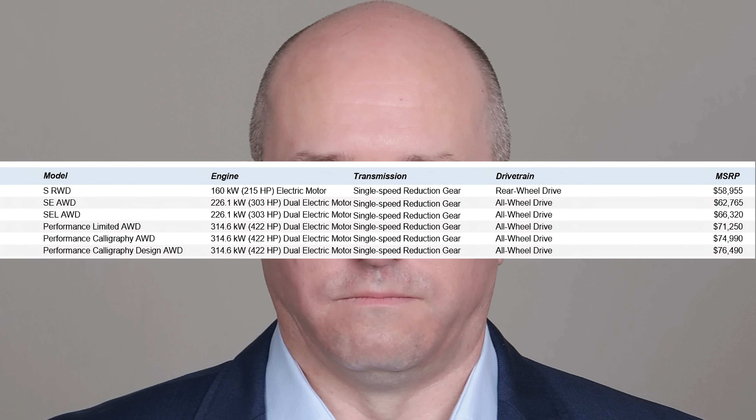But they really force you into the Limited or Calligraphy to get things like the premium audio system from Bose, including the active noise cancellation and a lot more of the niceties. And that's really pumping the price up past $70,000.

So the outside, they've spent a lot of time on interior and exterior design of this car. It's not really a big surprise for this brand. They focus a lot of their energy. They did have a global design team from Europe, the United States, and of course Korea to figure this out. And I think they've taken the best of all worlds here, because the outside, it's clever use of packaging, like in the sensor pack in the front.

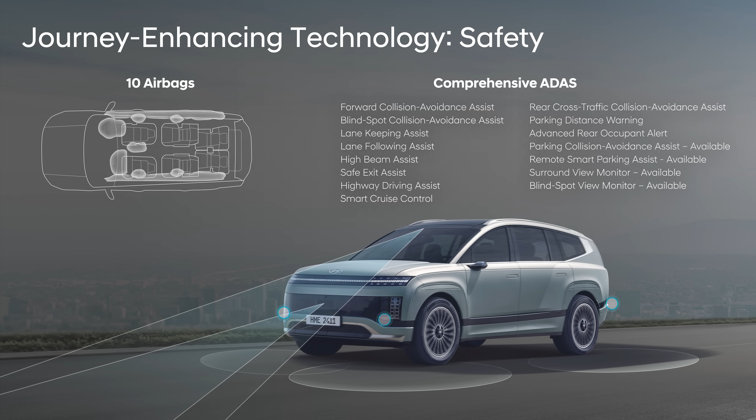They've hidden all of it behind this really clever black piece, and then you still have the individual pixel thing, which they talk about, throwing back to video game design and some of these things that the Ioniq brand has brought to the table. But other brands struggle with where to hide sensors. You see it with BMW, Porsche. Most brands really struggle with that, and they just make it so cohesive here. From headlight design to taillight design, it looks great.

And even the body lines now are not full of a bunch of crazy triangles. It's much smoother, despite the door handles being very gimmicky and bandwagony, very Land Rover-ish. They're super solid. I mean, you pull on them, you don't fight with them. It's not like they don't pop out when you need them to. So I think the software side of the keyless entry system is sorted out as well.

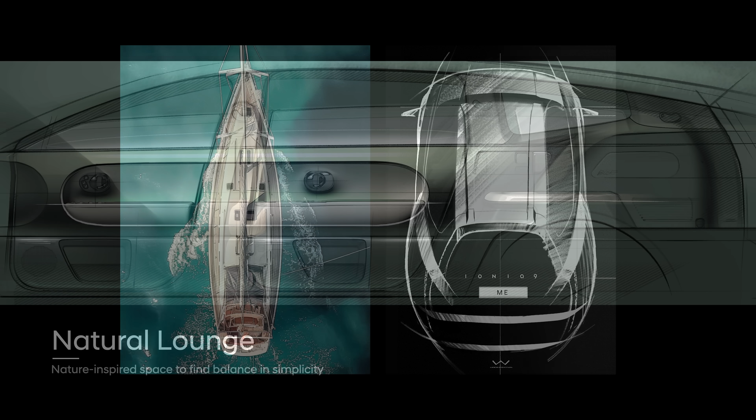The way that the roof line is, the way that the sides are, the way that the body is flowing air underneath, it is a very slippery car, and that's important when you're driving a big-ass SUV around. As an electric, you have to work with the battery pack confines, and they did a really good job here compared to the Rivian R1S, which really struggles with aerodynamics and range. This does not. But on the inside, a lot of the cohesion is also here.

The big thing that they tried to do is spend a lot of design on textures and feel, and that's physical controls, door handles that are physical, no electric actuators. The steering wheel controls are all physical, no haptics or touch. You have a physical rotary knob and tuning knob and physical buttons to get to your commonly used features. And your HVAC controls are partly physical, and then there's a touch-sensitive membrane here at the bottom, but you never have to interact with the touchscreen for any of that.

And the big thing is you're not in the touchscreen with this car a lot like you are in many other cars. And I think they're starting to understand that you can make a car feel great keeping some of the tried and true things, even though it might increase the cost, instead of doing generic screens. And there is a generic screen in here like every other brand, but really the software's gotten pretty good. It does slow down a little bit when I'm using wireless Android Auto, but overall the stability of it seems very good and well sorted out.

It does have a manual toggle for preconditioning of the battery if you're in the cold, so you can tell they're doing a lot of things to update these and keep them relevant. Storage is a highlight. As an electric vehicle, they can do things that other cars can't. This huge sliding center armrest gives you storage, a walk-through path, a clear path to put bags down here. There's a multi-tiered storage thing here for phones or whatever else.

There's a 100-watt USB-C charger in the front and in the back if you're charging tablets or you need to power a laptop. I mean, power is not an issue in here. Storage is really well thought out. There's tons of visibility. It's super comfortable in the front seats. Great adjustability. You can kind of recline the seat back if you're charging.

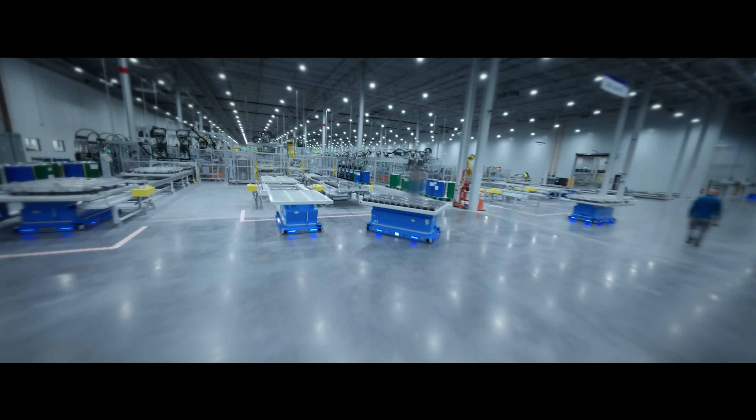Underneath the Ioniq 9, this is built in their factory in Georgia called the Metaplant. That's right, it's new as of 2025. It's making the Ioniq 9 and Ioniq 5 there, and they have the capacity to build plug-in hybrids as well. Their goal is to build upwards of 500,000 cars or SUVs there long term.

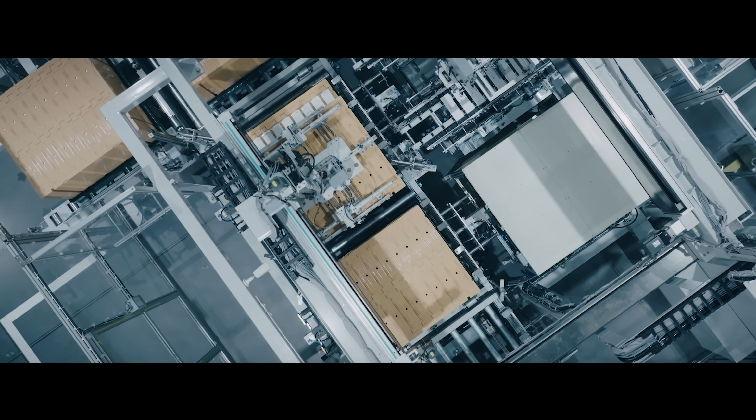Now, the other thing they're trying to do is bring more things in-house to that factory, like their battery fab with LG Chem. That's housed out of there, and eventually they're going to do some of their supply chain, like steel manufacturing somewhere in the south, but that's a future discussion.

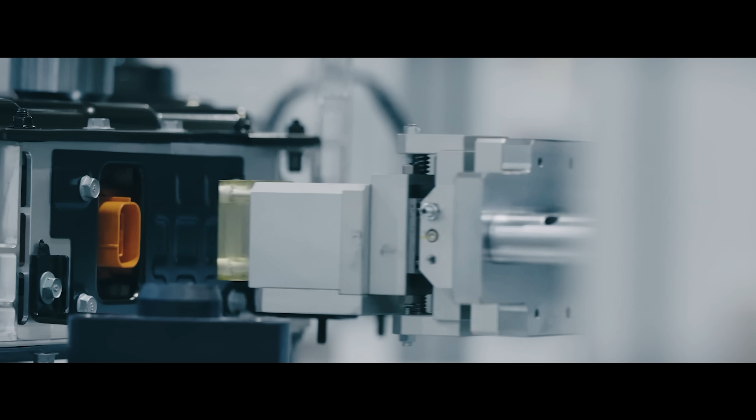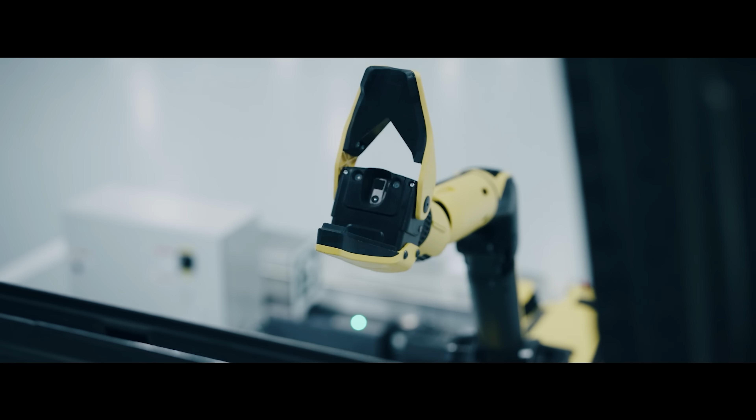With the Ioniq 9, much like all of their electric cars, it's built on E-GMP. It's a scalable platform that they can build every single electric car they want on, from Kia, Hyundai, and Genesis, from small to large, like this. All of the Ioniq 9s are a maximum stretch of that platform, and these vehicles all weigh upwards of 6,000 pounds. They're absolute tanks. That's because they are all equipped with 110 kilowatt hour battery packs.

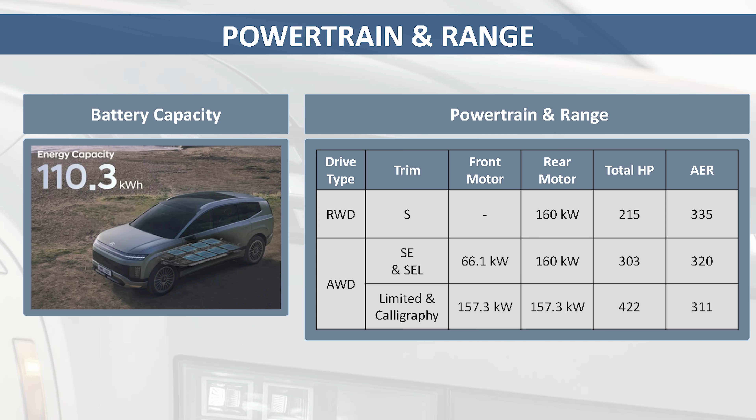Now, depending on what trim you get, the lowest range is the Calligraphy, because you have dual motor. It's more powerful, so your range is the lower end of 300. If you get the rear-wheel drive only version with a single motor, you can go up to 330 plus. Of course, this is all dependent on how you're driving and the temperature you're driving in, but they all come standard with heat pumps, which is really good.

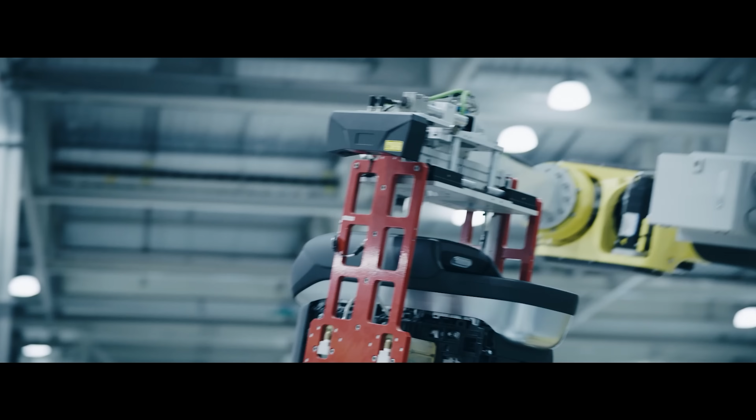You can choose manual battery preconditioning, and this vehicle gets NACS by default, which is the Tesla standard charging port, and it comes with an adapter so you can go onto the old CCS chargers, like Electrify America. Now, they have gone into bed with 7 other manufacturers, or more than that probably, for the Ionna charging network, which supports CCS and NACS charging. So no matter what you have, you can go there.

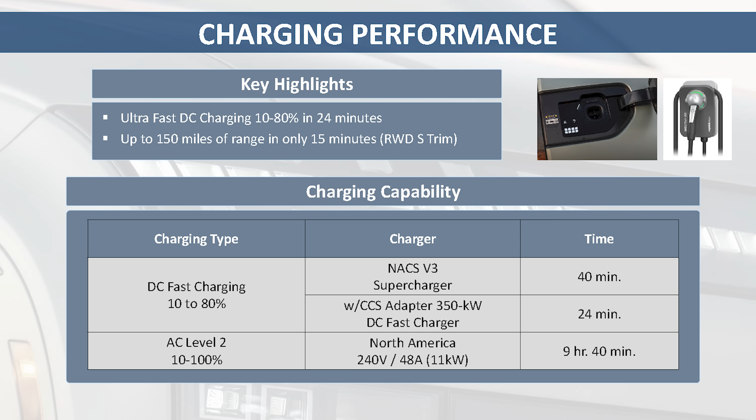There's a whole bunch of charging network infrastructure that's being spun up. It's way better now than it was, let's say, 5 years ago, when it was very scarce. So there's far more options. Now, the thing is, the NACS version 3 Tesla Superchargers take longer to charge this than the old CCS standard. If you find a 350 kilowatt charger, you can do 10 to 80% in roughly 20 minutes. With the Tesla Superchargers, it pushes upwards of 40 minutes to do the same thing. So again, pros and cons; depending on where you live, you have more options with this.

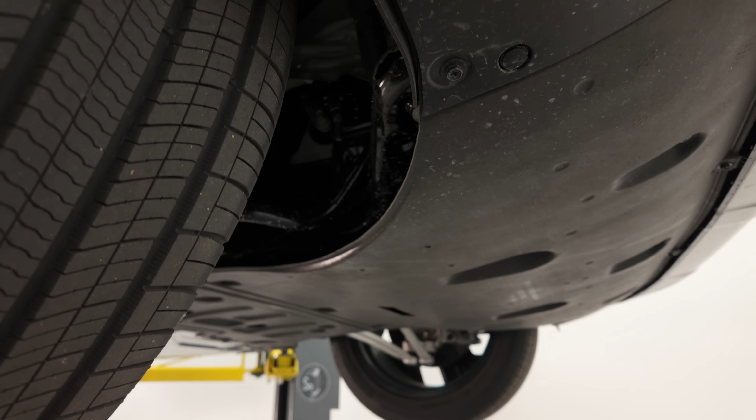Let's talk about the nuts and bolts briefly. The aerodynamics of this car are really amazing for the price point. They put a ton of effort in. You can see it on the underbody and on the exterior. Very flat, big surprise, it's got a battery pack. This is a strut front with a split lower control arm on the body.

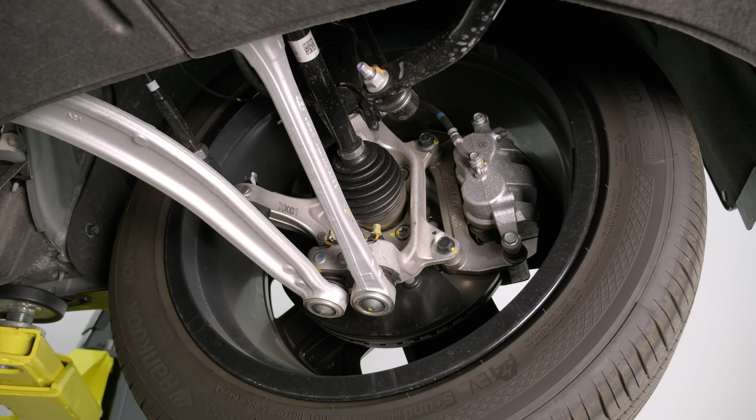A lot of this has to do with load. And the rear is a multi-link. One of the bigger things they've attempted to do with this generation is they're adding more foams in certain areas. They're really trying to drive down noise, vibration, and harshness, so this is a much quieter vehicle.

And they've implemented several strategies, but one of the biggest is, instead of trying to get the structure-borne noise from the body perfected, which takes a lot of time and development and simulation work and testing, they're trying to split the difference for something that's not a pure luxury car. So the way they do it is they add in active noise cancellation on certain trim levels. So basically, Limited and up, you get the digital active noise cancellation, which is sending out cancellation frequencies on the inside part of the car.

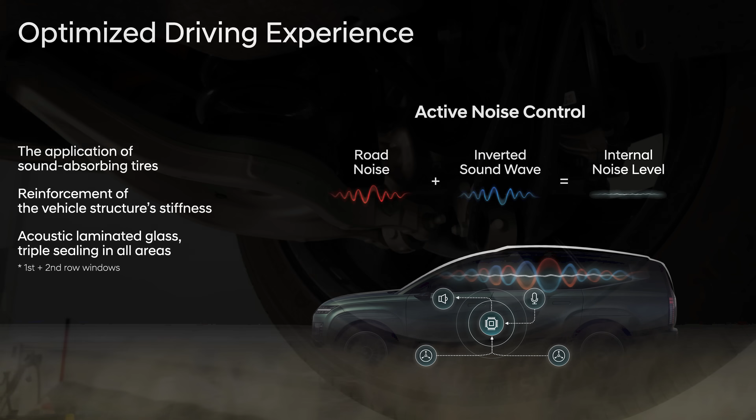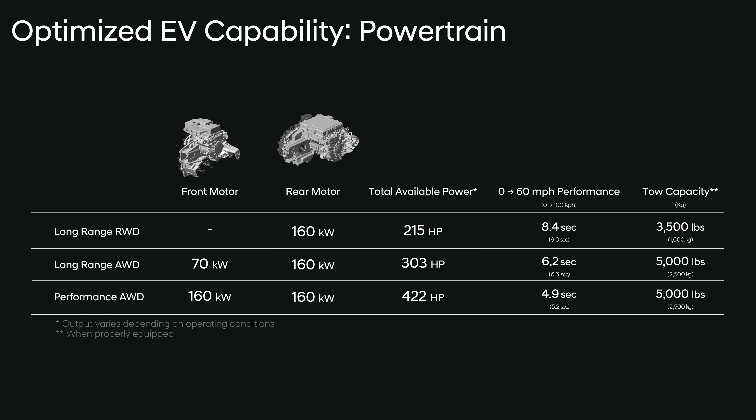It works with things like foam in the tires and the acoustic laminated glass, which that part is standard across all trim levels. So again, there's creative ways of doing this physically or mechanically and also digitally. Now, in terms of power, the base rear-wheel drive unit gets 215 horsepower. When you go to the all-wheel drive variants, it's about 303, and then you go to the upper high-performance trim levels, it goes into the 400s. Really, you're not buying this for performance, but if you're looking for higher power and torque, then clearly you have to go to the Limited and the Calligraphy.

This is a vehicle that is definitely far advanced from where they used to be. I think they've sorted out a lot of their issues, and I'll be curious to see how this is when I take it for a drive.

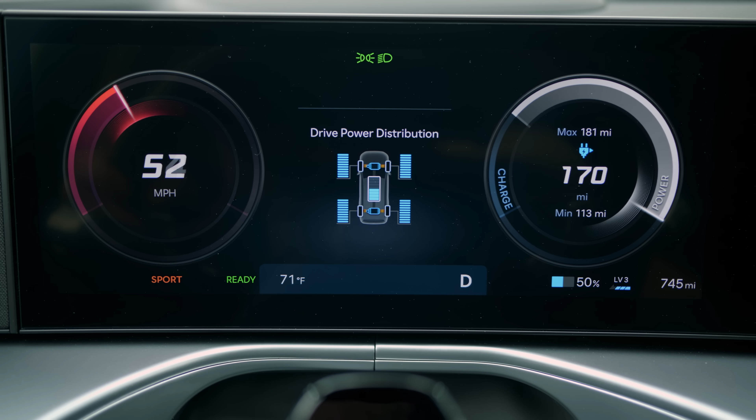Oddly enough, Jack wanted to take a vacation to Bowling Green for an all-American Corvette car, but little did he know, this is all-American too. Oh, I like my 3-row SUVs, floaty and fast. Whoa! Oh!

This is not the type of vehicle where the suspension instills you with a ton of confidence. This is a very soft, compliant, comfortable, quiet, and isolated SUV. Exactly what you want it to be. Yeah, there is almost no stress driving this thing. I couldn't believe when I got it for the first time, and I really didn't bore myself with all the technical presentations at that point. But what the designers tried to do on the interior space and the outside was, you hear this a lot, try to make it just a stress-free environment.

And I think there's a combination effect of, one, the acoustic treatments that they did with the glass, the foam, the underbody, the aero, it's all added up to a lot. And with the noise cancellation in the Limited and the Calligraphy trim, it does get rid of some of the pavement noise along with the foam in the tires. It's really, really refined. And not only is it refined, it's really good to drive. All the ergonomics are sound, seat adjustability is great, everything that you want from a family vehicle.

And I talked about this on the interior. I love the fact that they haven't taken the EV formula, at least in this car, and turned it into a completely digitally dominated experience. Because things are very physical, tactile. I'm never fumbling around and pecking at a screen to do the common tasks. It's just an easy car to get used to driving.